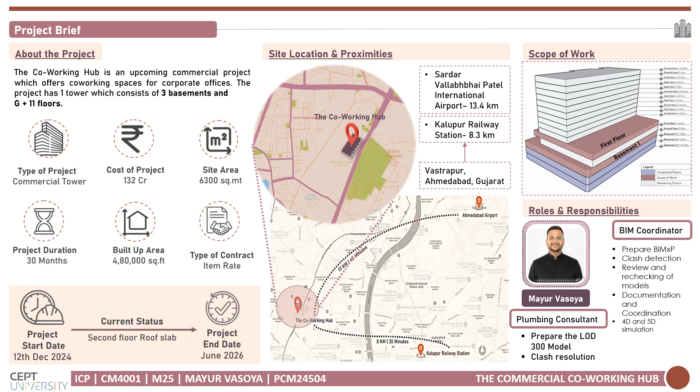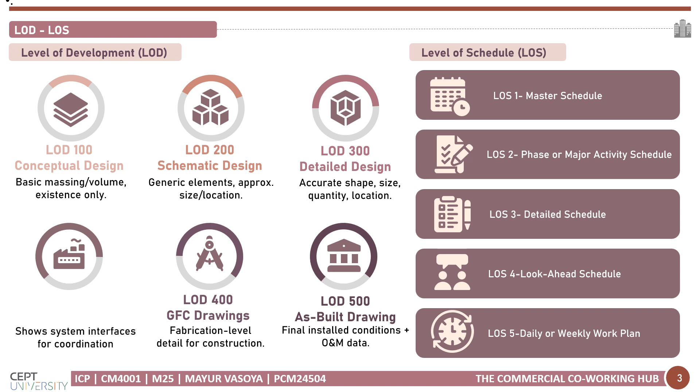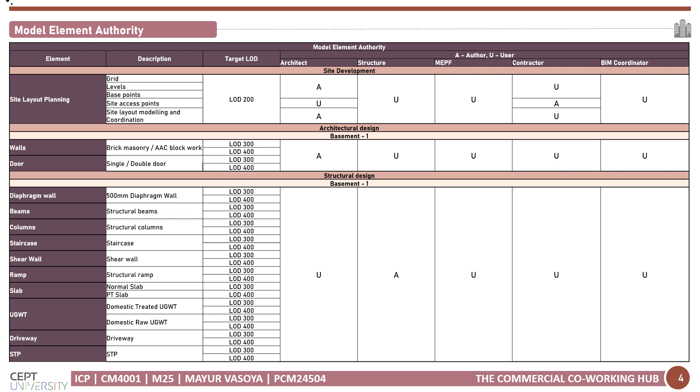Synchronized LOD and LOS help the project team work smoothly. When modeling detail and schedule detail grow together, it reduces clash problems, rework and time delays. It also allows better communication between the structural, architectural and MEP teams.

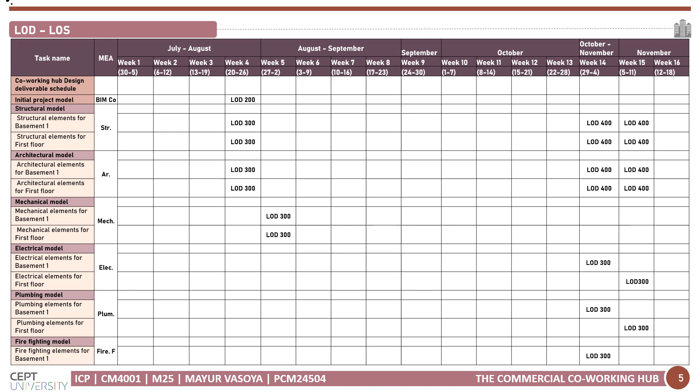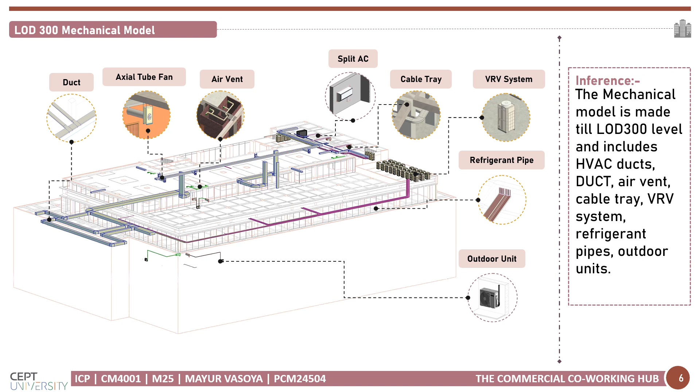This slide shows the LOD 300 mechanical model. At this level, duct size, pipe size, equipment position, and clearance are accurate. This model was used for coordination and clash detection with architectural and structural models.

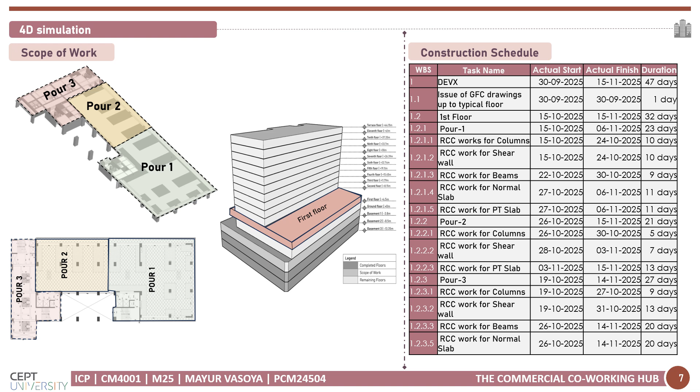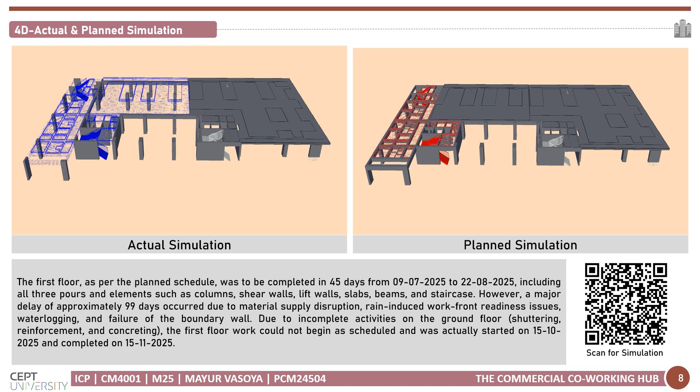So now move on to the 4D actual and planned simulation. For the first floor, the planned duration was 45 days, from 9 July 2025 to 22 August 2025. But due to multiple issues like material supply disruption, heavy rains, waterlogging, and boundary wall failure, the work was delayed by almost 99 days. Because the ground floor activities were not completed on time, the first floor work actually started on 15 October 2025 and was completed on 15 November 2025. This comparison between planned and actual helps us understand real life challenges in project execution.

In the 4D use case, one of the major issues observed was the staircase core. Casting the full core together delayed the shuttering work of pour 3 because curing took longer. Using 4D modeling, we proposed splitting the core into two sub-pours. This allowed the team to start shuttering for pour 3 earlier. As a result, we saved time and improved the floor cycle even during material delays.

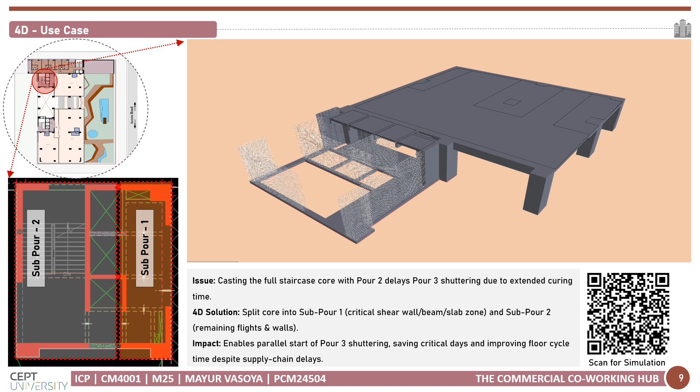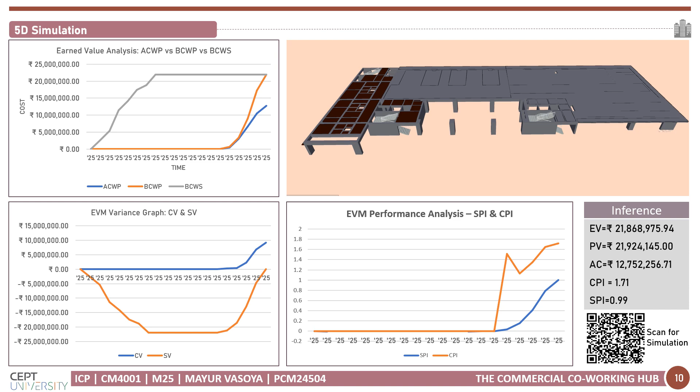So, in conclusion, this studio helped me understand the importance of integrating BIM with planning and execution. Through the 4D simulation, I learned how sequencing impacts real site progress. Through the 5D simulation, I learned how delays affect the cost and how EVM helps in decision making. And LOD and LOS together ensure proper coordination and reduce errors. Overall, this studio improved my skills in BIM, scheduling, planning, coordination, and problem solving, which are essential in the construction industry.